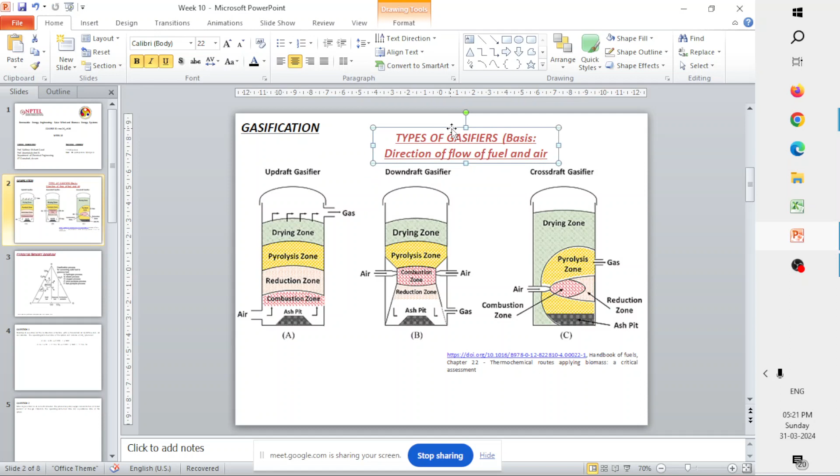In updraft gasifiers, the air enters from the bottom and the fuel comes from the top. Since the direction of the air and the direction of the fuel are opposite, it is called a counterflow gasifier.

In downdraft gasifiers, both the air and the fuel enter from the top to the bottom. Since the direction of both the air and the fuel is the same, it is called a concurrent flow gasifier. In case of a cross draft gasifier, the direction of flow of air and the direction of flow of fuel are perpendicular to each other.

That is the reason it is called cross draft gasifiers. So let's just see one by one what is actually happening in the downdraft, updraft and cross draft gasifier.

First let us see about a downdraft gasifier. As I said previously, it is called concurrent because the air is also entering from the top and the fuel is also entering from the top. Since the motion of air and fuel is in the same direction, it is called concurrent in operation, and the 'down' actually signifies the place from where the gas is taken out. Once you burn the biomass, the product gas generated has to be taken out of the gasifier, and in case of downdraft gasifier, it is taken from the bottom. That is the reason it got the name downdraft gasifier.

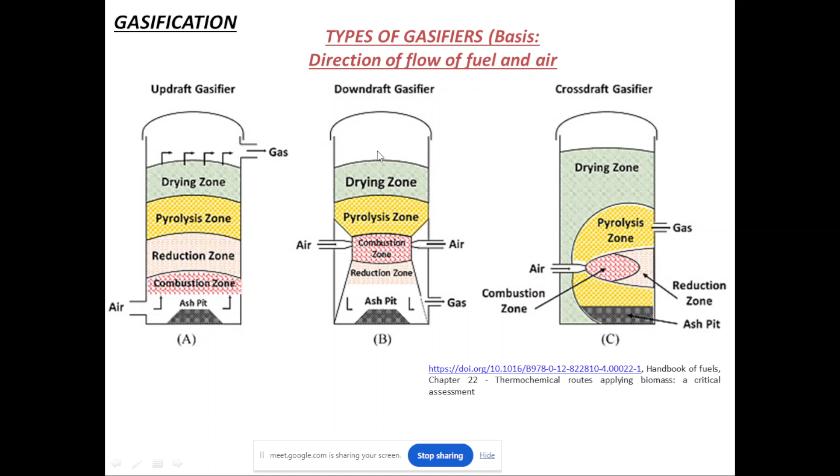Next we move on to pyrolysis. In pyrolysis, as I said, the biomass is burnt in the absence of oxygen.

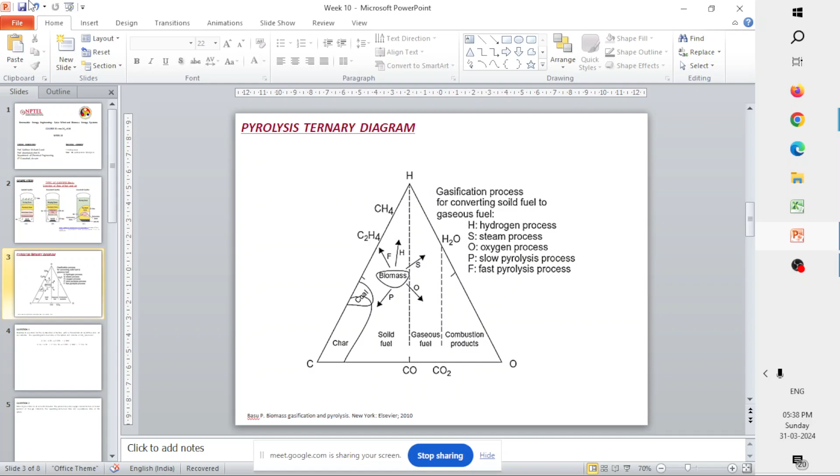Does anybody have any doubt? It's simple. If you know this diagram, and have an understanding of the process, then you will be able to understand. If it is a slow pyrolysis process, a low temperature process, it basically results in the formation of solid char. That's the reason the process is pointing towards your corner, which is corner C.

Similarly, fast pyrolysis process is moving towards your carbon-hydrogen line and away from the oxygen line. So the majority of products produced by a fast pyrolysis process will have carbon and hydrogen as major constituents compared to oxygen. Similarly, in oxygen process, oxygen will be majorly present in your product. Steam will be oxygen and hydrogen, so there won't be much carbon. That's why the arrow mark points towards your OH edge line.

And for hydrogen process, it points towards your hydrogen corner, because the majority will be hydrogen produced in the pyrolysis process. By seeing the diagram, you can actually say what kind of products will be produced for a particular process, or if you know the process, using the diagram you can say what will be the percentage of char. Likewise, by knowing the process you can actually plot the diagram.

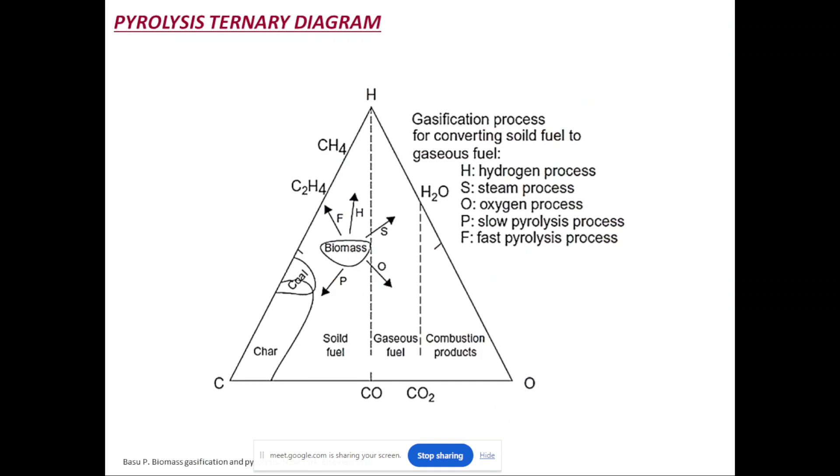So this is about the pyrolysis ternary diagram. If you have any doubts about the gasifier and pyrolysis ternary diagram, then do let me know. In case you don't have any doubts, then we will move on towards solving some numerical problems.

So in case if you have no doubts, let's move towards this question. Let's just read the question. This question is very similar to what we did in the week 9 live interaction session, where we asked you to develop an equation for the combustion of propane, and there also we had a theoretical air requirement and excess air requirement, and we asked you to calculate the air to fuel ratio.

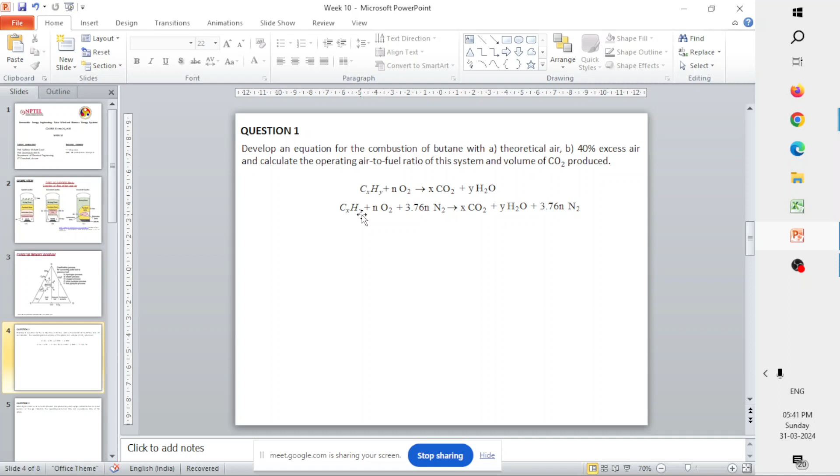Here it's a similar question, but now we are focusing on the combustion of butane. Since we have done this previously and it's also solved in the video lecture in the course, I would like you to solve it first before we discuss the solution here. I'll give you some time to solve the question and then let me know the answer, since this is what we previously did in our last week 9 live interaction also.

I'll just open that so it will be easy for you. So here, if you see, we did it for the combustion of propane, and we had two conditions: one is the theoretical air requirement, and the other is the excess air. 30% excess air was used for the combustion of propane, and we were asked to calculate the operating air to fuel ratio of the system. So we first developed the combustion equation of how propane reacts with oxygen.

Resulting in the formation of carbon dioxide and water. Then with respect to that, we developed two different equations. The first equation is for theoretical air, where the amount of oxygen involved in the process will be in stoichiometric quantity, so the exact quantity will be used. In the second case, you are going to use 30% of the excess air.

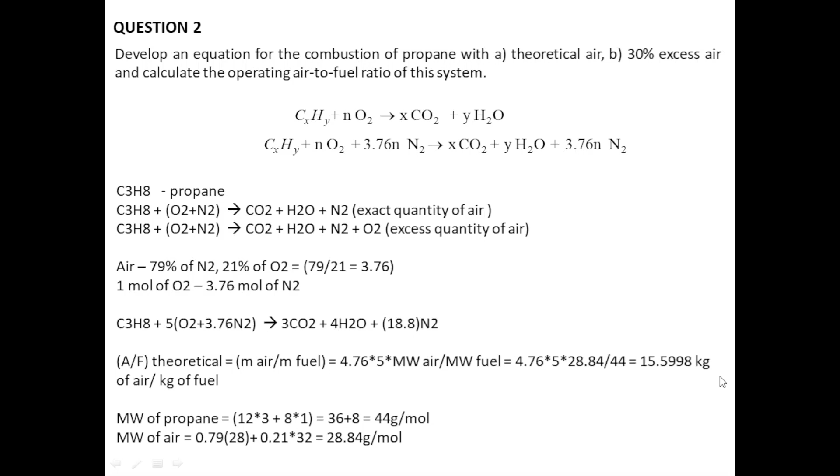Similarly, we calculated for propane, C3H8. Atomic weight of carbon is 12, of hydrogen is 1, and from there you calculate the molecular weight of propane. The number of moles of oxygen involved in this process is 5, so we multiply that by 5, and after the calculation we got the air-to-fuel theoretical ratio as 15.5998 kg.

Similarly we did for the excess air requirement. 30 percentage is present in excess, so with the theoretical quantity, we take 30 percentage of that and add it to the theoretical quantity of air required, and develop the equation. Here also we balance the carbon, hydrogen, oxygen and nitrogen atoms on either the reactant and product side, and from that we calculated the air to fuel ratio of our system.

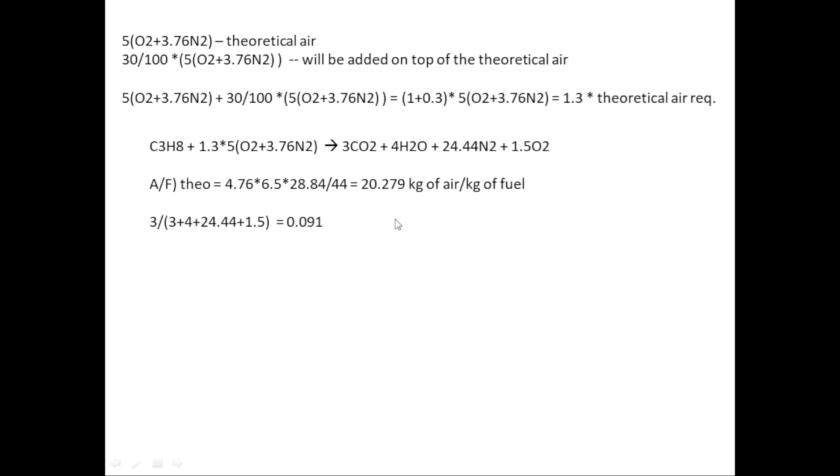So this was the procedure that we developed last week. Similarly, now you have to solve for this particular system of butane.

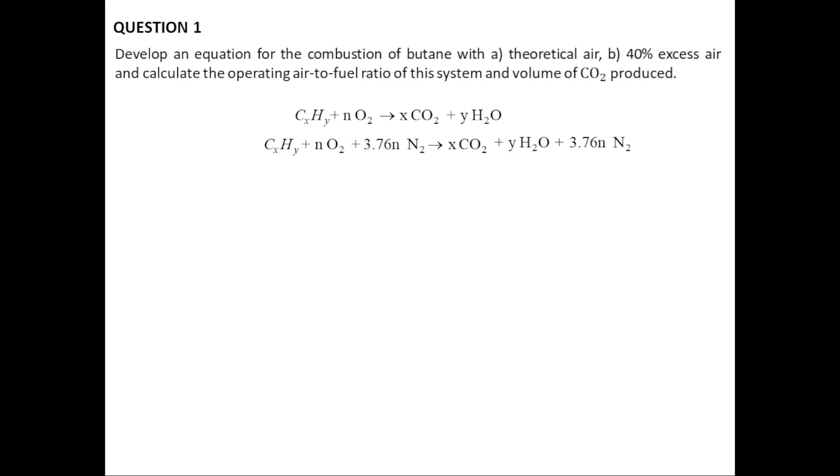First we need to develop the equation for butane, the combustion equation. Then after that we need to calculate the air to fuel ratio for the system. Butane formula is C4H10. I hope you are able to recollect that. Let's just solve that problem here. I hope so, or otherwise you guys can also solve it and let me know the answer, because once you develop the equation it will be easy for you to do the calculation.

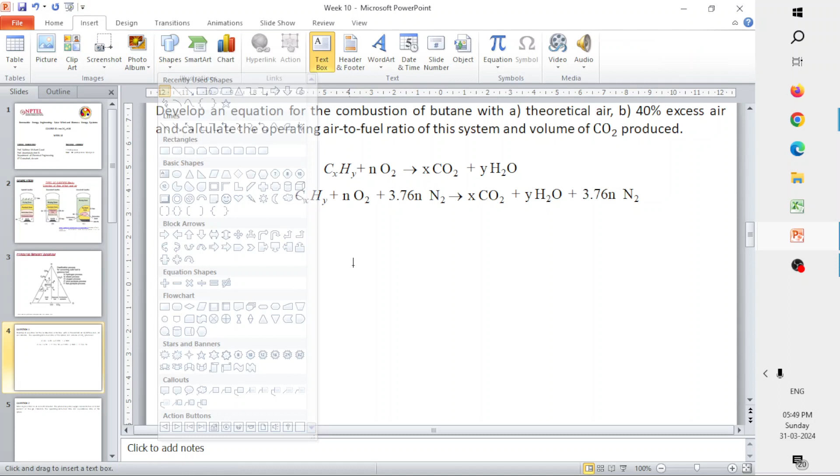Let me write the equation for the combustion of butane with oxygen. Butane is C4H10 plus, you have both your oxygen and nitrogen. Since for the first case we are going to use theoretical air, that is the exact stoichiometric quantity of air, no O2 will be present on the product side. So it will be only carbon dioxide, water, and nitrogen, because the nitrogen is not going to react with the butane system.

Now you need to balance this. The number of atoms of carbon in the reactant side is 4, so in the product side also it should be 4, so we insert 4. The total number of atoms of hydrogen in the reactant side is 10, and since it is H2O, the total atoms should be 10 in the product side too, so it is H2 times 5.

With this we can calculate the number of atoms of oxygen in the product side, and based on that balance it in the reactant side. Oxygen atoms total 4 from CO2, and since it's O2, 4 times 2 is 8, plus 5 from water is 13, and since it's already O2, it will be 6.5, and nitrogen atoms will be 6.5 in the product side. So this is your equation.

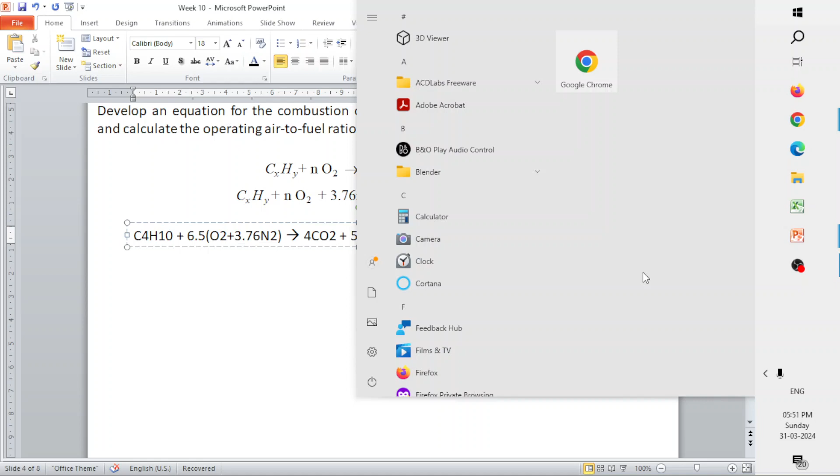Oh sorry, it's 3.76, because for every mole of O2, 3.76 moles of nitrogen are present in the air. You need to take that into consideration too, so it will be 6.5 times 3.76. Let's calculate what that will be: 6.5 times 3.76 equals 24.44. This much amount of nitrogen will be present on the reactant and the product side.

So now it's just about calculating the air to fuel ratio. Stoichiometric air-fuel ratio is nothing but mass of air over mass of fuel, and the formula is 4.76 times N, where N is the number of moles of air involved in the combustion process. Here the number of moles of air is 6.5, so we insert 6.5 and the molecular weight of air.

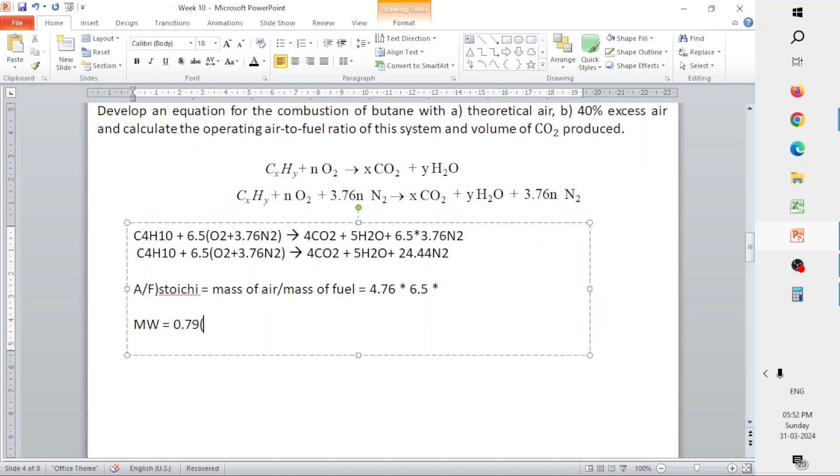So molecular weight of air, let me recalculate here. It's 79% nitrogen, N2 gas molecular weight is 28, plus 0.21, that is the oxygen contribution, and molecular weight of oxygen is 32. If you do the calculation: 6.72 plus 22.12 equals 28.84 grams per mole.

And what is the molecular weight of butane? Please let me know what is the molecular weight of butane.

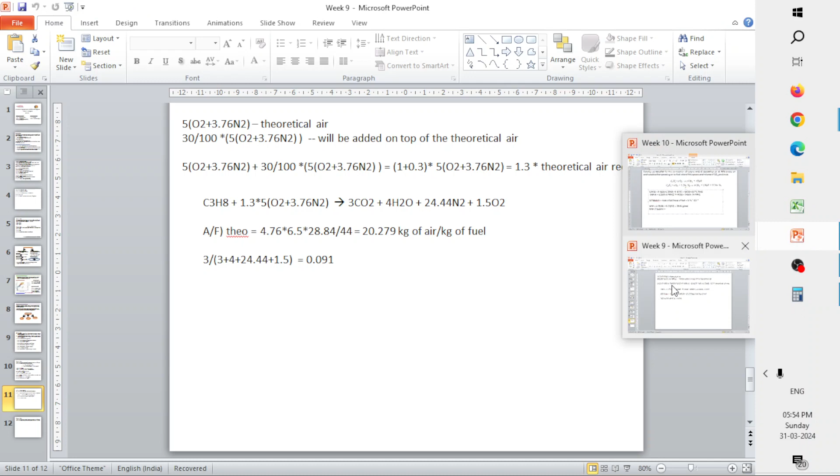It is C4H10, right? So molecular weight of butane will be 4 times atomic weight of carbon, which is 12, plus 10. It is 58 point something, so you can take it as 58, let's keep it as a whole number. So 58 grams per mole. So for 1 mole of butane there will be totally 58 grams.

So now I think you can calculate the air to fuel stoichiometric ratio. This will be 28.84 and that divided by 58. So what will be your answer for air to fuel stoichiometry? It just needs this multiplication.

Yes, what will be the answer? What will be the air to fuel ratio, stoichiometric ratio? Yes, I need answers. What will be the answer for this?

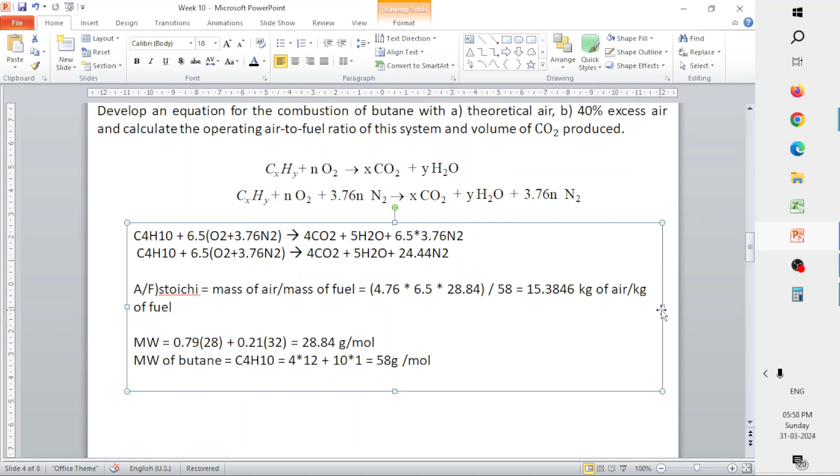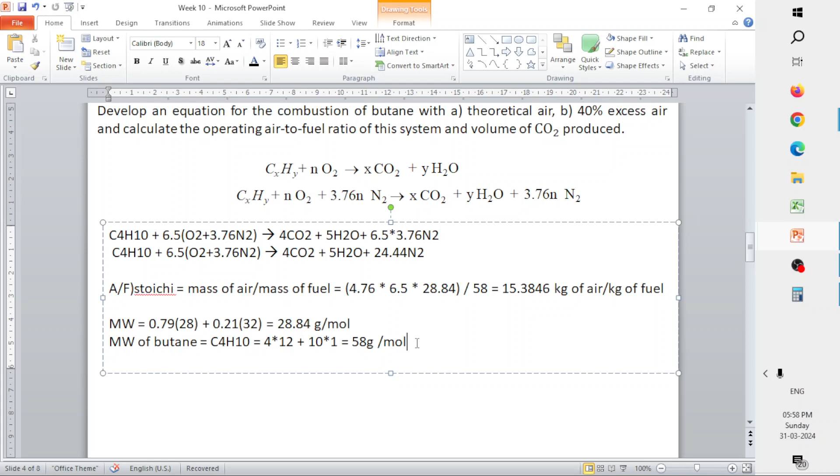So this is for the theoretical requirement or stoichiometric requirement of air. If you burn your butane in stoichiometric quantity of air, this is the air to fuel ratio required. But if you are going to do it in excess of air, the air to fuel ratio will change. So now we are supposed to calculate when you are going to burn your butane with a 40% excess of air. Here what is going to change is the amount of air, the value of n, and that will change your entire answer.

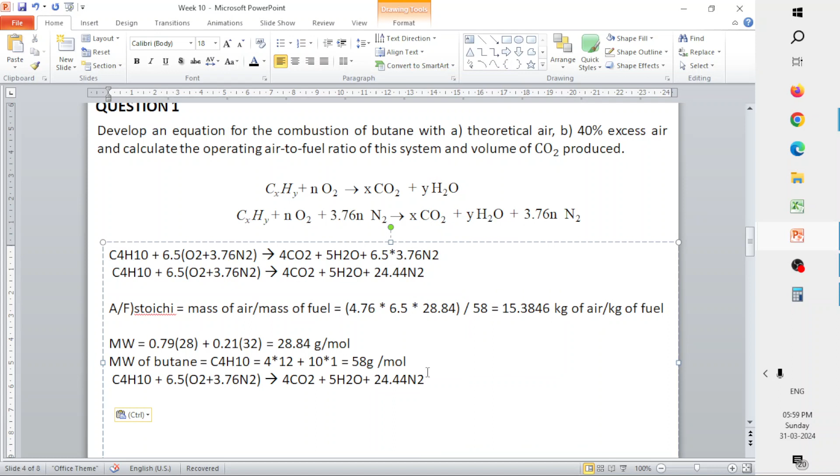So let me know what will be the equation for this system when you are going to use 40% excess of air. You are going to use 40% excess of air in the system compared to the stoichiometric quantity of air that you used for the previous problem. So what will be the new equation?

So it will be nothing but 6.5 times... 6.5 moles of O2 of air is what you require, is your stoichiometric quantity, and you are going to have 40% excess of that. So as I said previously, it will be that stoichiometric quantity plus 40% more of the stoichiometric quantity. So 40% of this will be nothing but 0.4 times 6.5.

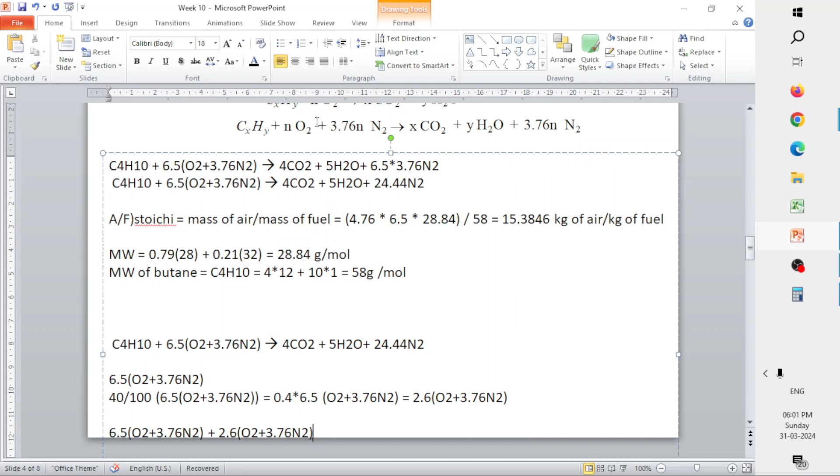So what will be the total? Yes, you just need to add 6.5 and 2.6. So that will be 9.1 mole of air will be required. The 9.1 mole of air will be used for combustion of butane, if you are going to use 40% excess air compared to the stoichiometric quantity of air.

So you now know the number of moles of air required. So you have the equation C4H10 plus 9.1 moles of air is going to react with this. So for 1 mole of butane, 9.1 mole of air is going to react, and that is going to generate carbon dioxide plus water plus the excess of oxygen. If any oxygen is going to be present, that oxygen will be released out, and then your N2, which will come out as such as it entered without reacting.

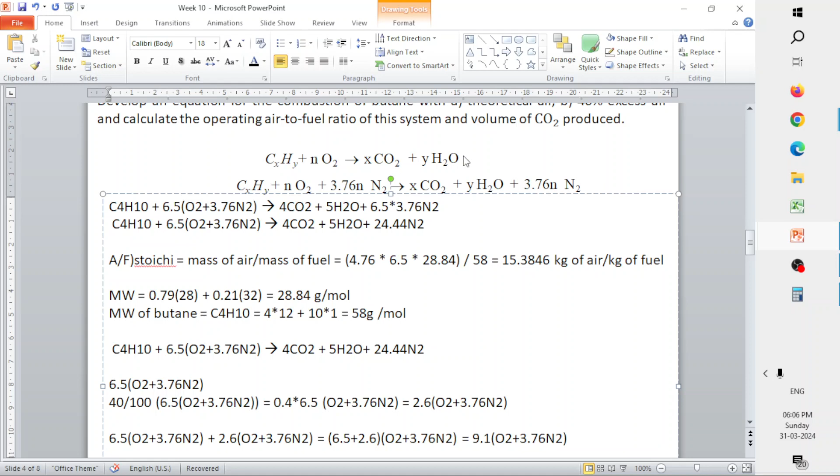So which means 9.1 mole of air will be participating in your combustion reaction. So air to fuel ratio will be nothing but, can you guys calculate and let me know what will be the air to fuel ratio in this case when you use 40% of excess air? I have told everything, you just need to do the multiplication.

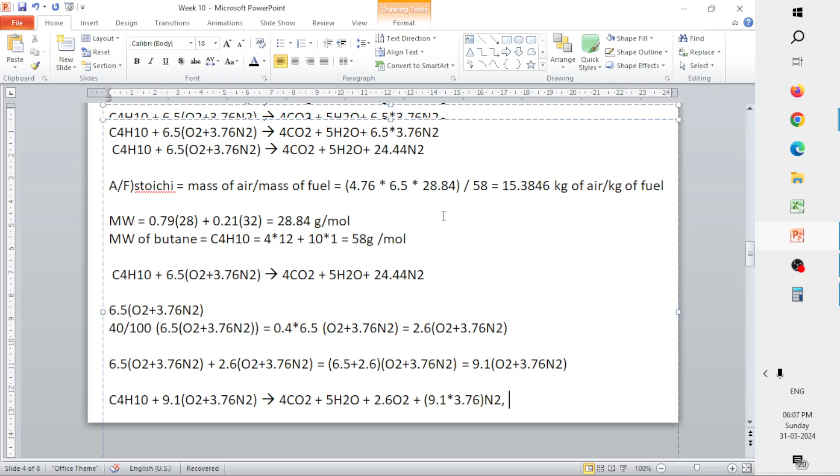A air to fuel ratio for the system is required. What is it? Please let me know.

So air to fuel ratio of your system is nothing but the mass of the air involved to the mass of the fuel used, and that is nothing but 4.76 times the number of moles of air used in the combustion of the butane, times your molecular weight of air by molecular weight of your fuel. Molecular weight of air is 28.84. Molecular weight of fuel, here fuel is butane, and butane's molecular weight we calculated as 58. So you know the molecular weight of fuel, the molecular weight of air, and also the number of moles of air involved in the combustion process. So please let me know what is the air to fuel ratio of the system.

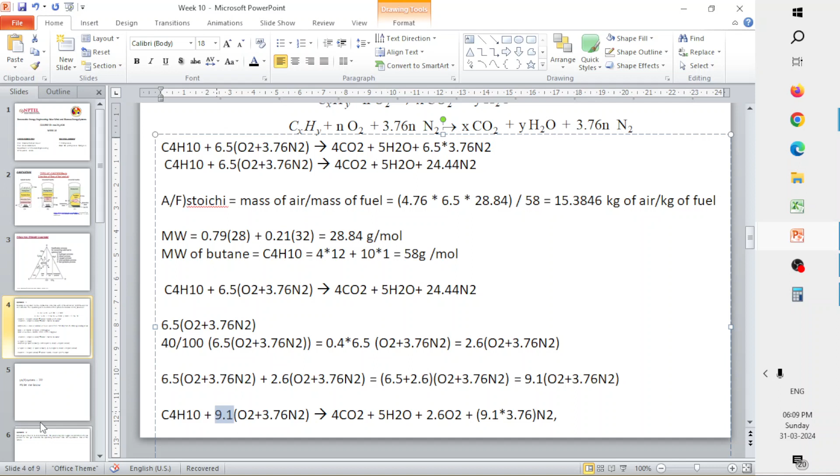It's just you need to do the multiplication. You know the number of moles of air that is involved in the combustion process. So 9.1 moles of air, or excess air, is involved in the combustion of your butane. So you know now your value of n. Let me know the answer.

So let's calculate. 4.76 times 9.1 times your molecular weight of air, that is 28.84, and your molecular weight of fuel, that is butane, which is 58. So let's calculate 4.76 times 9.1 times 28.84 divided by 58. So the answer is 21.538 kg of air per kg of fuel.

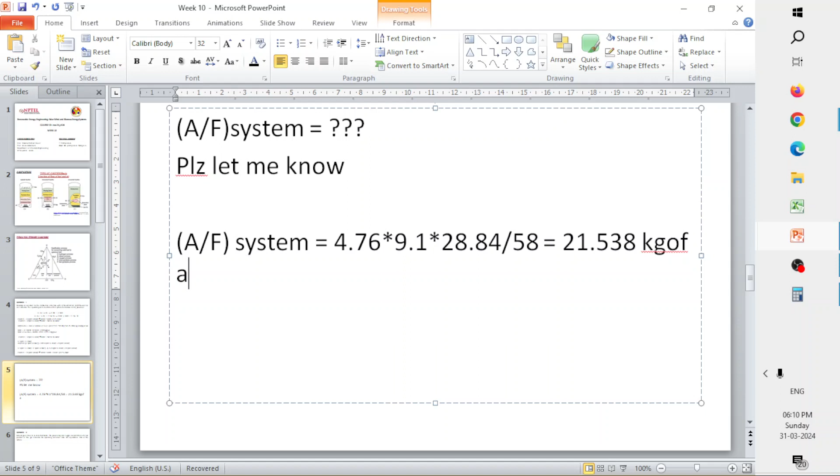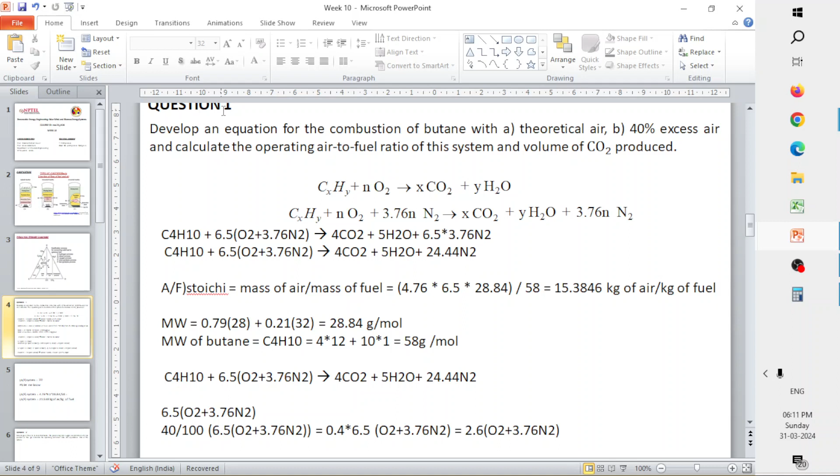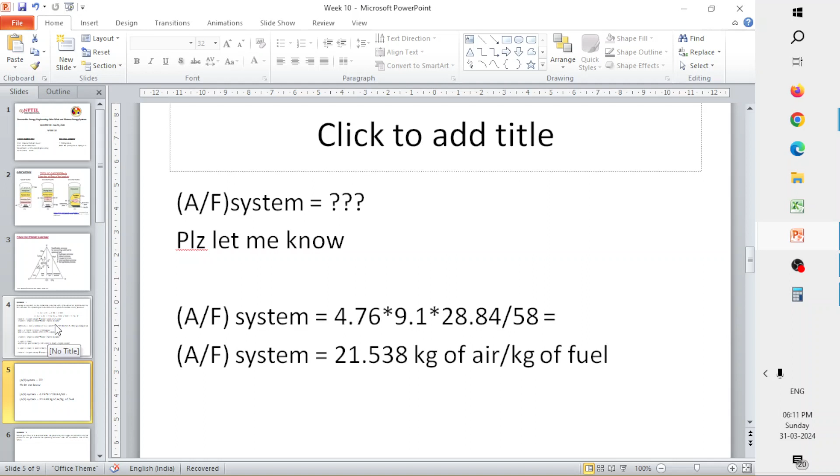So this is your air to fuel ratio for the system that involves 40% excess air for the combustion of butane. So we are done with these kinds of questions on developing the equation for the combustion of any kind of hydrocarbon, and then calculating the air to fuel ratio for that system. We have solved two problems, and I hope you will find it easy and you can solve these types of questions comfortably and confidently.

Whenever it is asked for you to solve, either in your assignment or exam, we now move on to our next question, which is a similar type of problem on calculating the air to fuel ratio and equivalence ratio. Here we are taking a natural gas, which is going to be fired in an industrial boiler. The process requires the oxygen concentration of 4 mole percent of flue gas. They are asking you to calculate the air to fuel ratio and the equivalence ratio.

So here you know the oxygen concentration, but it's given in terms of mole percentage of your flue gas. It's not directly given like theoretical air requirement or excess air requirement, but in terms of mole percent. So you are supposed to use this information to calculate the two parameters, and you can assume here that your natural gas consists of methane. Natural gas is methane. For solving purposes, we take natural gas as methane.

So again, very similar, you need to develop the equation and then solve the problem. Since we now know how to develop the equation from our previous live interaction session and also from today's session, I require you to write the equation for the combustion of methane, CH4. You write the combustion equation of methane and then tell me.

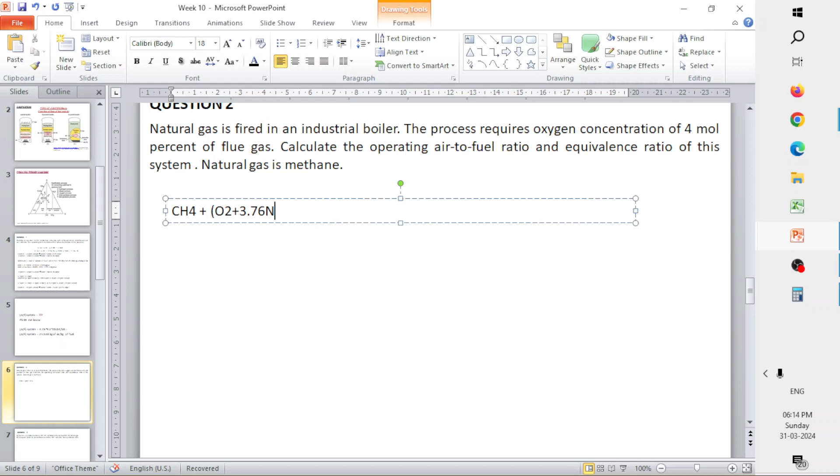So it is nothing but CH4 plus your air, that is oxygen and nitrogen. And since here we do not know whether they are going to supply us with an excess of air or whether it's just a theoretical quantity of air, here we just know that the concentration is 4 mole percentage of flue gas. So let's just consider A moles of air is going to react with your methane and then form the products.

So that will be CO2 plus H2O. And since we are not aware of whether it is stoichiometric quantity of air, theoretical quantity of air, or excess of air that is going to be involved in the process, for safety purpose we just write O2 in the product side also, plus the nitrogen gas that will be coming out of the system.

So here if you see, you can actually balance the hydrogen atoms, you can also balance the carbon atoms, that will be 1. Now you just need to balance your oxygen atoms. Nitrogen atoms will be 3.76 times A.

And you do not know how much amount of the O2 is going to come out in your product side. It can be any value, B can be also 0. So you don't know, so you give a variable B.

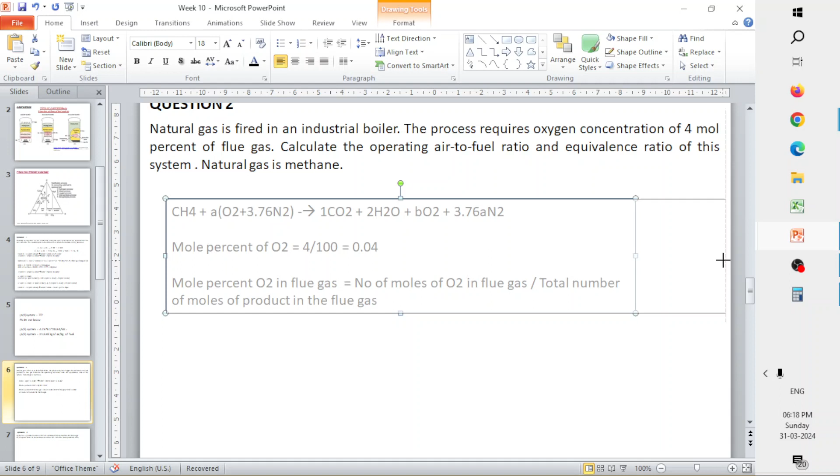So mole percentage of O2 in the flue gas is 0.04. Number of moles of O2 in the flue gas, if you see here, we have taken a variable B, so we can write B divided by total number of moles of product in the flue gas.

So mole percent is nothing but number of moles of that particular component to the total number of moles in the product. So total number of moles in the product will be 1 mole from CO2, 2 moles from water, and again B moles from O2, because since you are calculating the total number of moles of O2 in the total number of moles in the product side, you need to also take into account the number of moles of O2 here, plus 3.76 times A.

So you can now calculate the relationship: 0.04 is nothing but B divided by 3 plus B plus 3.76 times A. Now we need to get a relationship between B and A, because here you have one equation but two variables, so you cannot solve. So we need another relationship between B and A, so that we can solve this equation.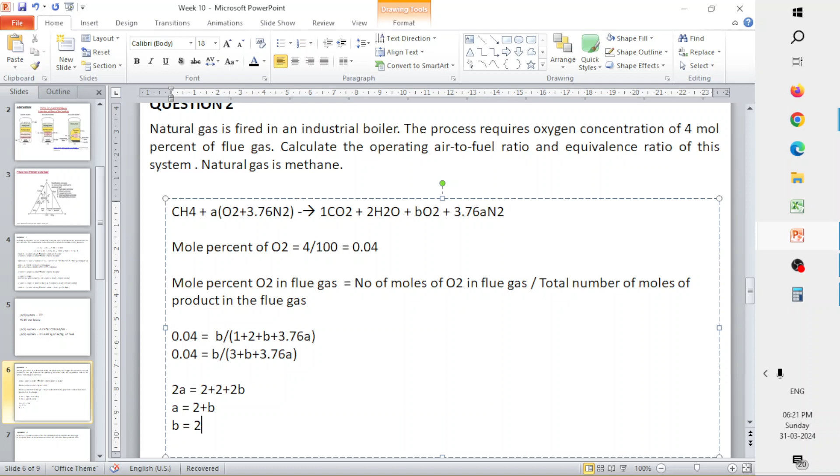This equation is with respect to our given data that says that the oxygen concentration in your flue gas is 4 mole percent. So we express that mole percentage as number of moles of O2 in the flue gas to the total number of moles of product in the flue gas, and then we balance our equation for the carbon, hydrogen, oxygen and nitrogen atoms, and then we get a relationship as B equals to A minus 2. This is your second equation. Now using two equations, you have two unknown variables and two unknown equations, so you can solve for both the variables.

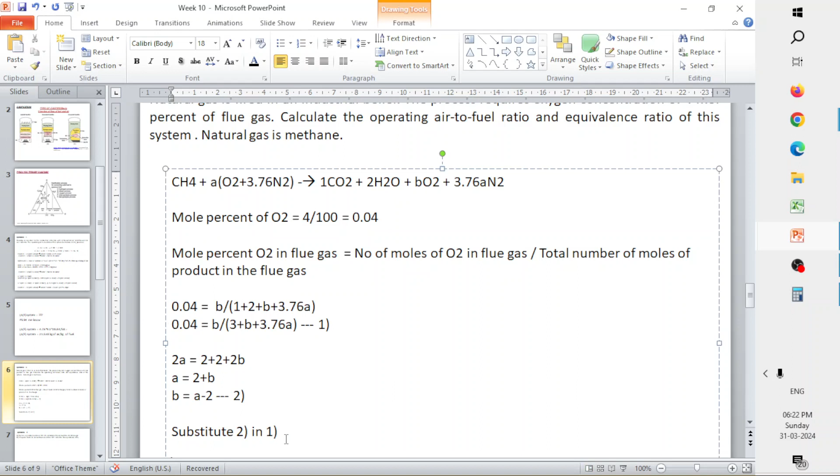So substitute 2 in 1, so that will be 0.04 equals to, here B is nothing but A minus 2, so A minus 2 divided by 3 plus A minus 2 again plus 3.76A. So that will be A minus 2 divided by 3 minus 2 will be 1 plus A plus 3.76A will be 4.76A.

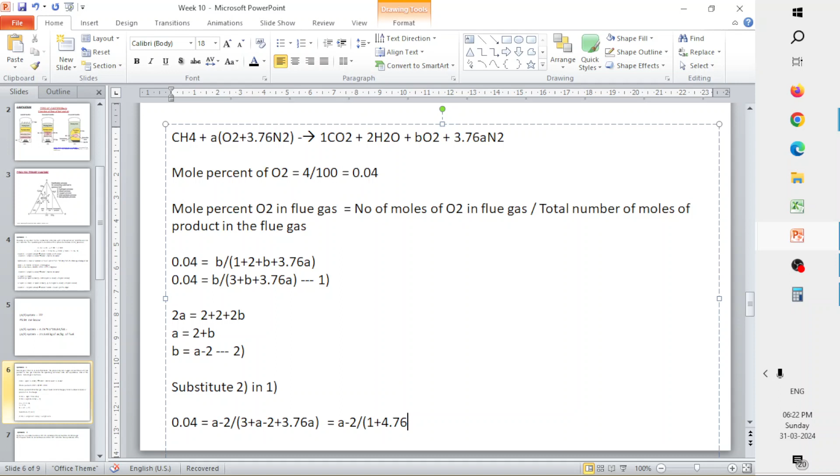So now you need to solve the equation and get the value of A. So do let me know what will be the value of A. It just you need to cross multiply and then get the value of A.

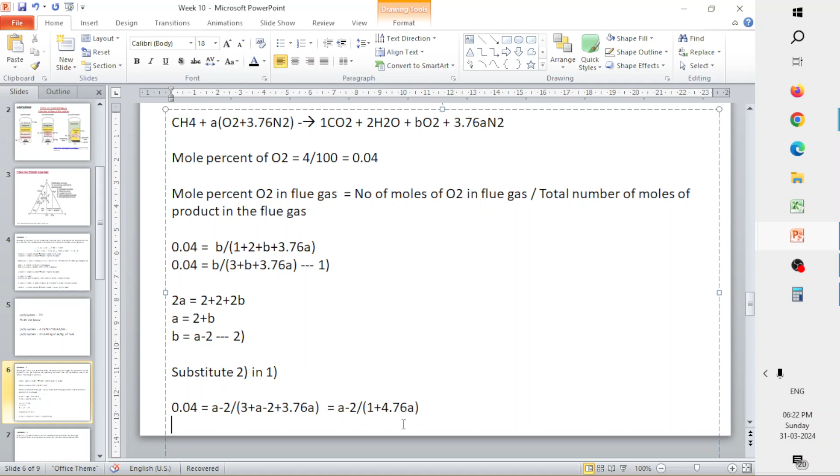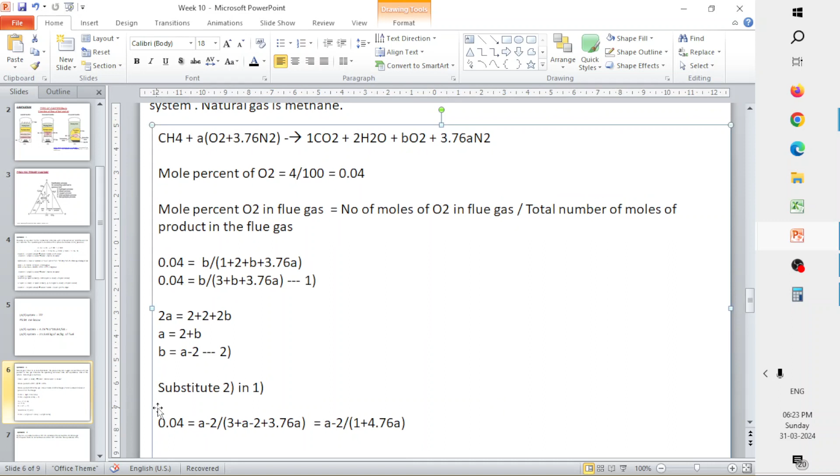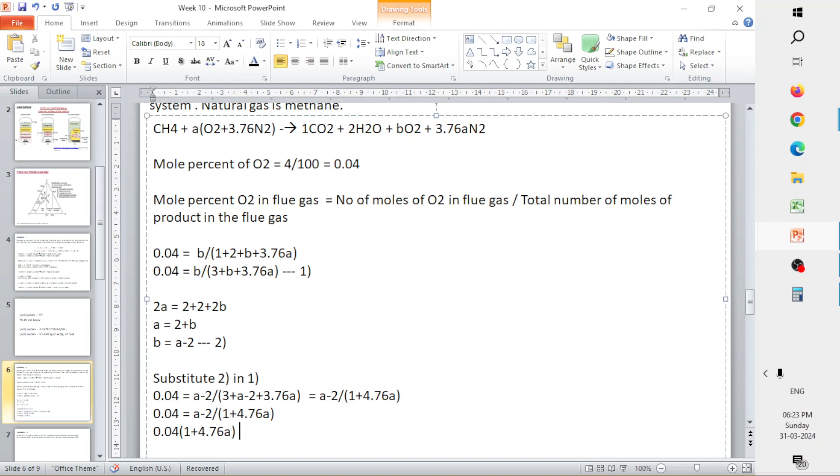So 0.04 equals to A minus 2 divided by 1 plus 4.76A. So if you cross multiply this, yeah, if you cross multiply this, you will be getting is equal to A minus 2. So just open the bracket.

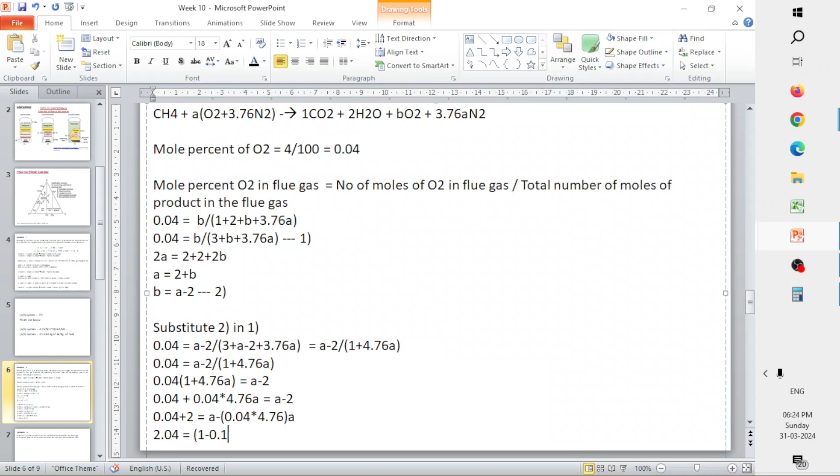We take the variables to the right hand side and then your numericals to the left hand side. So it will be A minus 0.04 times 4.76. So it will be 2.04 equals to 0.04 times 4.76, that is 0.1904. 1 minus 0.1904 times A. So the value of A will be 2.04 divided by what is 1 minus 0.1904. 1 minus 0.1904 is 0.8096.

So that will be 2.04 divided by 0.8096, which will be 2.519 or 2.52 you can take. So this is your value of A.

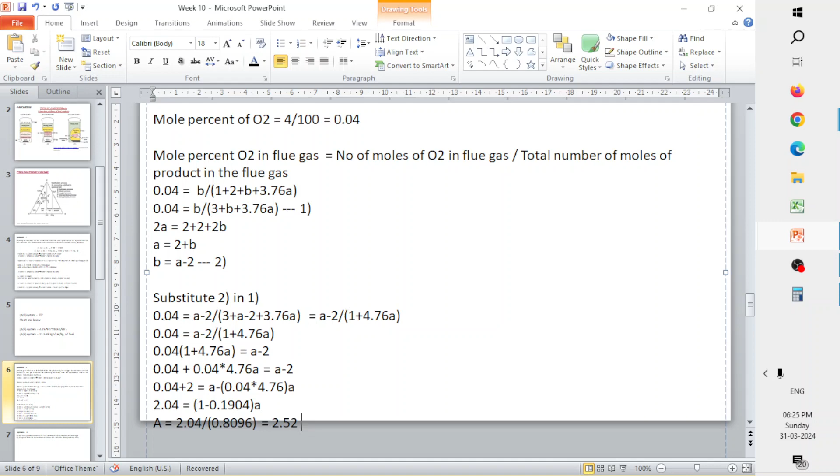Now you know your value of A, so that means you know your number of moles that is involved for the combustion of methane. From this you can calculate the air to fuel ratio for the system. So calculate this and then let me know the answer. Please let me know the answer. I'll just come back, I need to take some water. So in the meantime, please calculate the air to fuel ratio for your system.

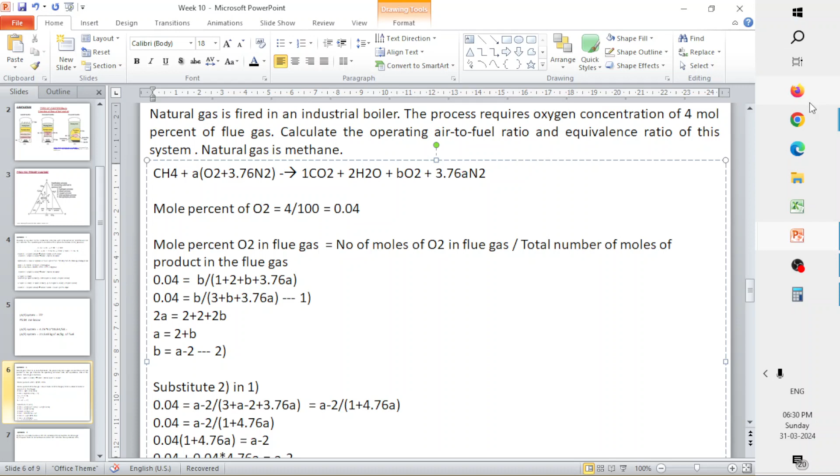So yes, what is the air to fuel ratio for the system? Anyone? Okay, so let's just calculate that value.

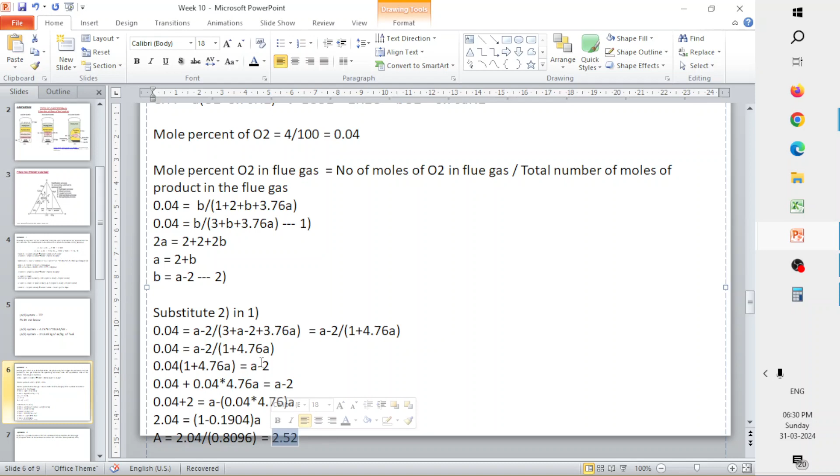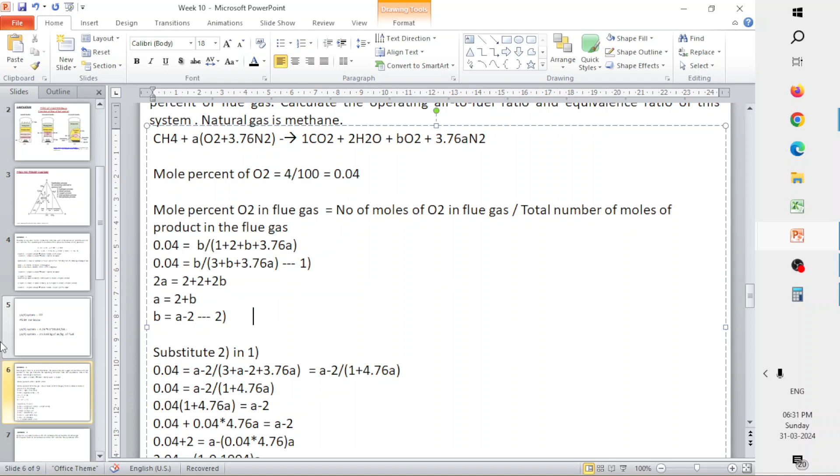So now here you know the value of A. So A is nothing but the number of moles of air that is involved in the process. So which will be air to fuel ratio of the system is nothing but mass of your air to the mass of the fuel. So that is equal to 4.76 times the number of moles of air that is involved in the process.

So A value is 2.52 we calculated, that is your number of moles of O2, or of air that is involved in the process, times 28.84 divided by methane's molecular weight, CH4, so 12 plus 4, that is 16. So what will be the answer for this? Let's just calculate. 21.6213 is the answer.

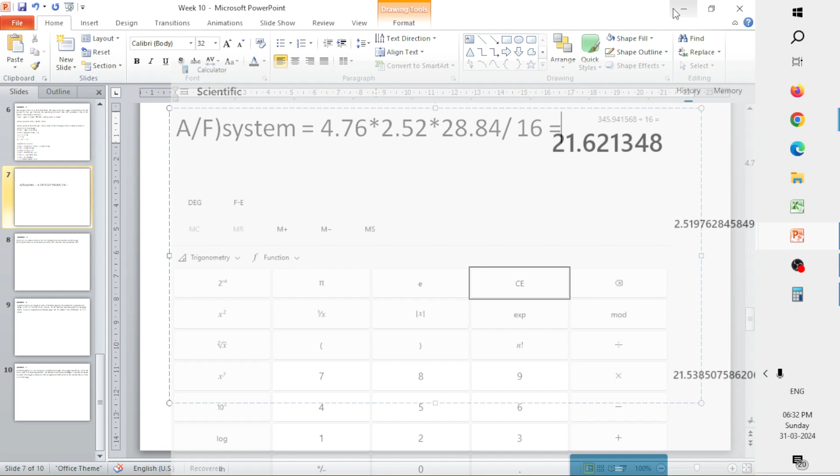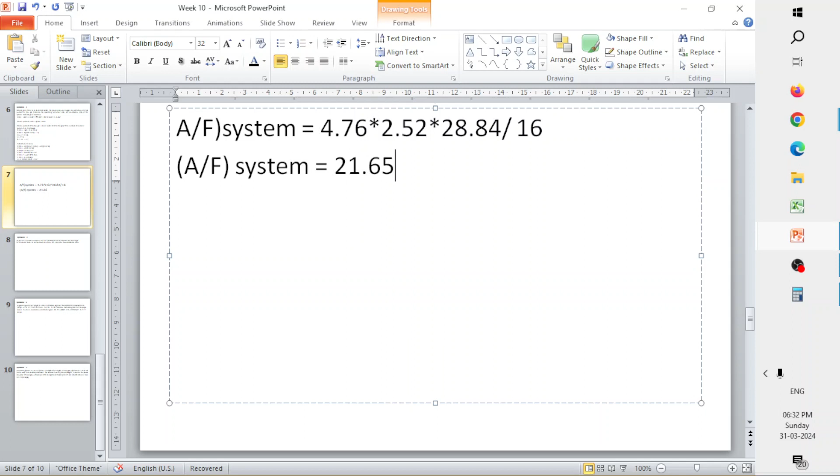Kg of air per kg of fuel. So the air to fuel ratio for your operating system is 21.65 kg of air per kg of fuel if you use 2.52 moles of air for the combustion of methane.

Now we are also asked to calculate the equivalence ratio of your system. So what is the definition of the equivalence ratio? So if you remember, the equivalence ratio is defined as the ratio of the air to fuel ratio, or the stoichiometric air to fuel ratio to the air to fuel ratio of your system, right? So it is, what is your equivalence ratio? Equivalence ratio is nothing but air to fuel ratio, the stoichiometric air to fuel ratio.

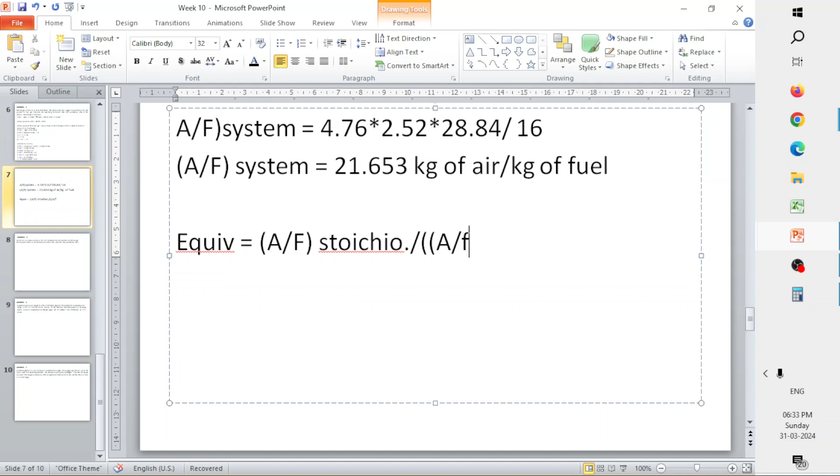Stoichiometric divided by the air to fuel ratio of your system, that is the operating system in operation. So in operation we know the air to fuel ratio is 21.65 kg of air per kg of fuel, but to calculate the equivalence ratio you need to know what is the stoichiometric air to fuel ratio for your system. So for that we need to again develop that equation and then calculate the air to fuel ratio stoichiometry, and from there we will be able to calculate the equivalence ratios.

So we need to know how much amount of moles of air will be used, or what is the stoichiometric moles of air will be required for our process, right? So that will be CH4 plus O2 plus 3.76 N2, since we know we are just going to use stoichiometric quantity of air, so there will be no excess of oxygen that will be coming out of your system in the product side as a product.

So here again we need to balance the carbon, hydrogen, oxygen and nitrogen atoms. 2 and 2 will make 4, so carbon and hydrogen atoms are both balanced. If you see the oxygen atom total is 4 here, so it will be 2, and this will be 3.76 times 2.

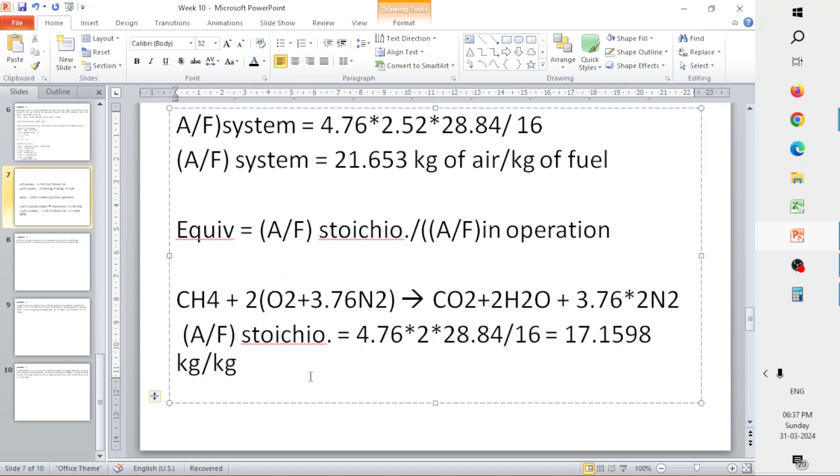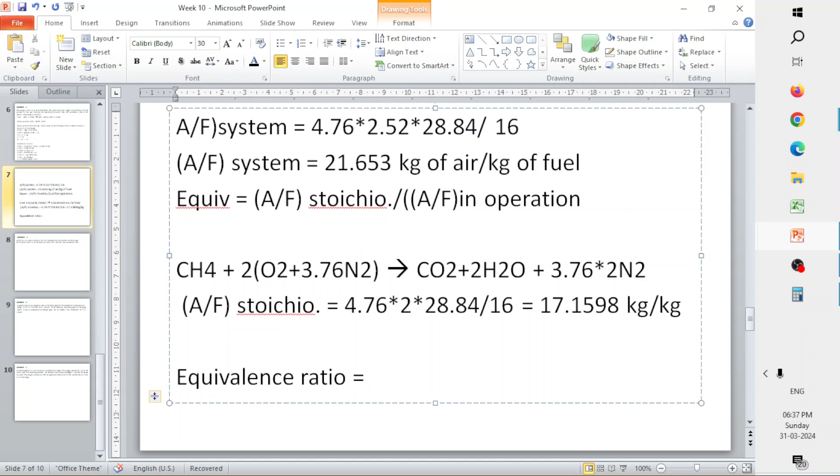Similarly, kg per kg. Now we need to calculate the equivalence ratio, that is nothing but the stoichiometric air to fuel ratio, that is 17.1598 divided by the air to fuel ratio of your operating system, that we got as 21.653.

So your equivalence ratio will be 17.1598 divided by 21.653, 0.792. This is your equivalence ratio.

So this is how you calculate your equivalence ratio. When you are asked to calculate the equivalent ratio, you are supposed to calculate both the stoichiometric air to fuel ratio and the air to fuel ratio of the operating system as per the question, and then divide the stoichiometric air to fuel ratio by the air to fuel ratio of your operating system to get the equivalence ratio. So similarly, for this question also, we can calculate the equivalence ratio.

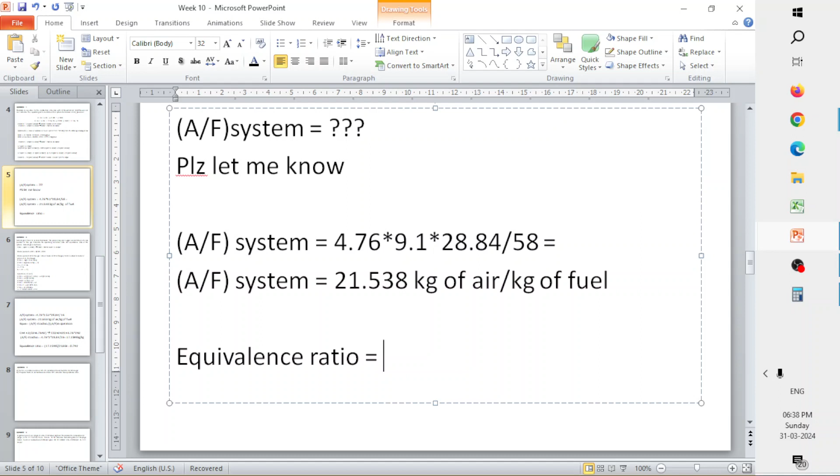So it will be nothing but the stoichiometric value is, where is it, 15.3846. This is for the previous problem. If you remember, over there we didn't calculate the equivalence ratio, so we are calculating it now.

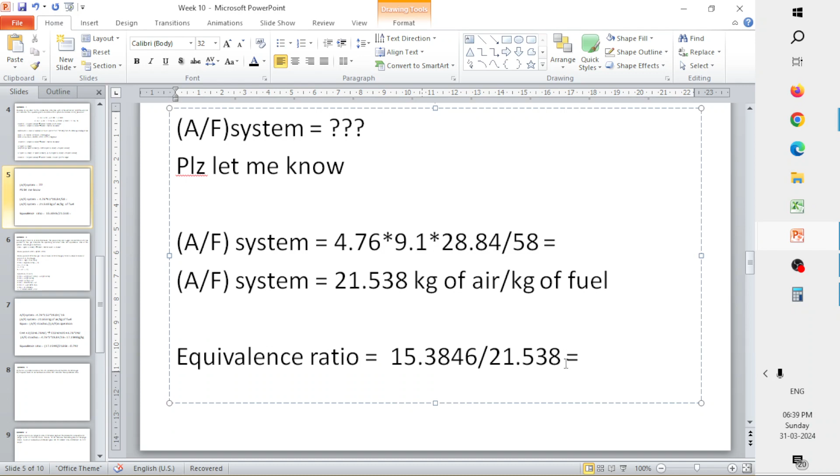And air to fuel ratio of the operating system as per the question is 21.538. So the value will be, what is the value, 15.3846 divided by 21.538, 0.7143. So the equivalence ratio for our previous problem is 0.7143 and for this problem is 0.792.

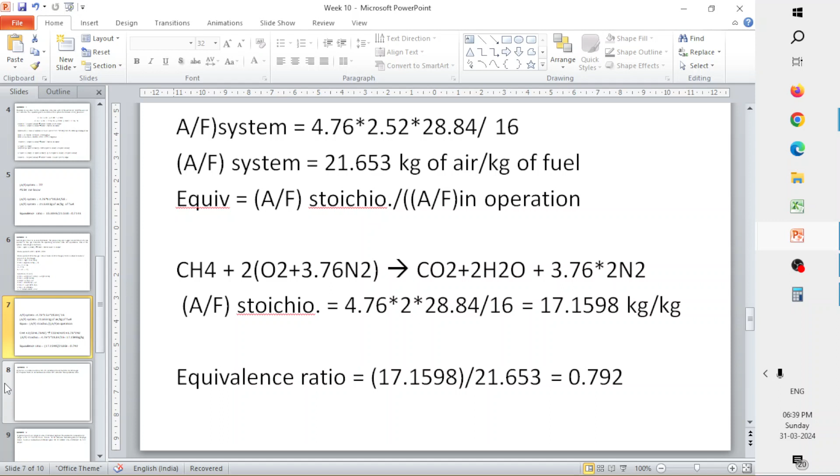So this is how you develop an equation, calculate the stoichiometric air to fuel ratio and the air to fuel ratio of your operating system, and then its equivalence ratio. Similarly, we have another question, but this is a very simple question compared to what we have done previously, and this is a very straightforward question also. Here it is in 2 parts, and these 2 parts do not have any interdependency.

The first part says that your equivalence ratio is 0.6 and is asking you to determine the air to fuel ratio for an ethane gas, operating air to fuel ratio for your ethane gas. Second part gives your air to fuel ratio as 18:1, and they are asking you to calculate the equivalence ratio.

So instead of asking you to develop an equation and then calculate all the parameters, one parameter is given to you, and you are asked to calculate the other interdependent parameter. So compared to the previous two questions, this question is quite simple.

So for the first question, since you are given the equivalence ratio and they are asking you the air to fuel ratio of a system, you have to calculate the air to fuel stoichiometry first, the stoichiometric air to fuel ratio. Once you calculate that, you know your equivalence ratio and your stoichiometric air to fuel ratio, so you will be able to calculate your air to fuel ratio of your system.

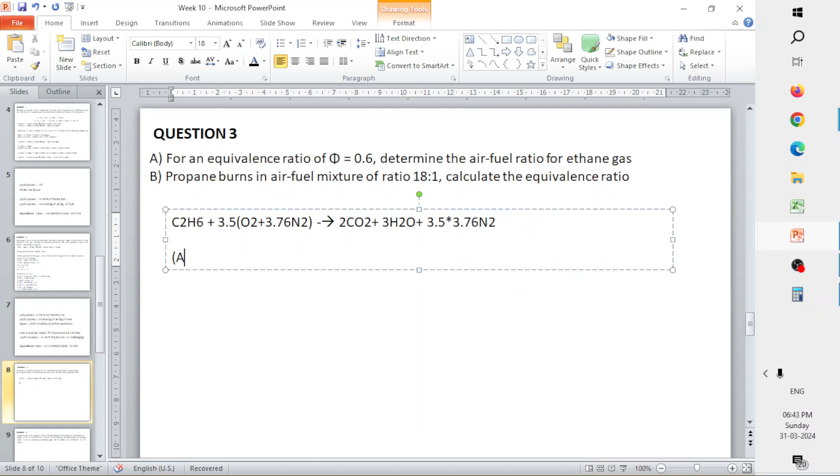Since you know this, you can calculate the stoichiometric air to fuel ratio as 4.76 times 3.5 times air is 28.84, this remains constant, and molecular weight of your fuel is the ethane molecular weight, so that will be 24 plus 6, so 30. 4.76 times 3.5 times 28.84 divided by 30 gives 16.015.

So if you know your stoichiometric air to fuel ratio, now you have your equivalence ratio given to you. Once you know both of them, you will be able to calculate your air to fuel ratio for the system, which is nothing but the stoichiometric air to fuel ratio divided by your equivalence ratio. So that will be 16.015 divided by 0.6, that is 26.69.

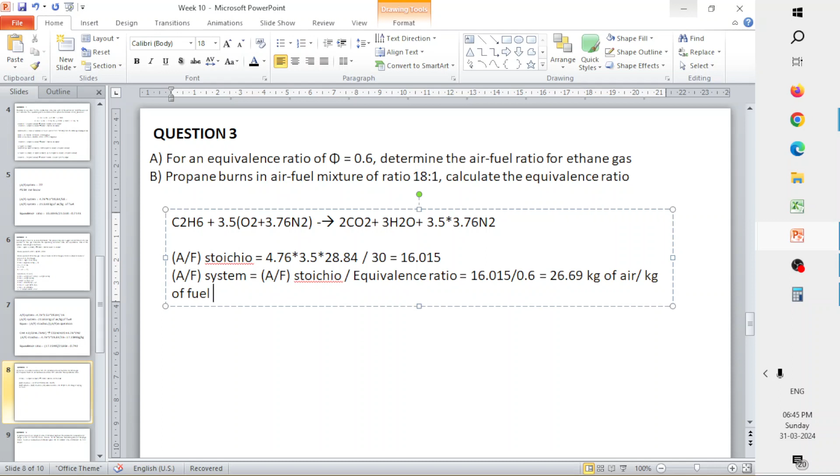That's kg of air per kg of fuel. It is important to know the units for this parameter. So now you know how to solve one. I hope you will be able to solve the B part also on your own. You can take this as a home task, it is very similar. You need to develop an equation which involves stoichiometric quantity of air.

You need to develop an equation to get the number of moles of air that will be required for burning your propane. Once you know the number of moles of air required for burning your propane, you will be able to calculate your stoichiometric air to fuel ratio. And once you know that, you have your air to fuel mixture ratio for your operating system, so then you will be able to calculate your equivalence ratio.

So yeah, we end our discussion on air to fuel ratio and equivalence ratio here. We have approximately solved 5 problems, including what we covered in the last live interaction session. I hope you will be able to comfortably solve this now.

Now, in case if you have any doubts in this, please let me know, so that we can have a discussion over this before we move on to our next 2 questions. Does anybody have any doubt?

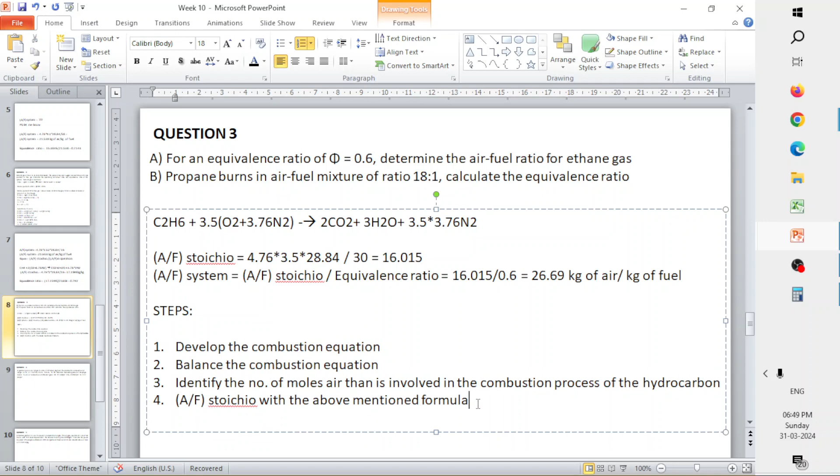So if you don't have any doubt, let's move on to the next question. Here it states that a gasifier is used, and it's producing syngas at a rate of 0.265 kilomole per kg of feed, and the volumetric composition of the syngas is given as carbon monoxide, methane, hydrogen and nitrogen. Now they are asking you to calculate the heating value of your syngas, and they have given you the heats of combustion of different gases also.

So here you are asked to calculate the heating value. It's very simple. Let's solve.

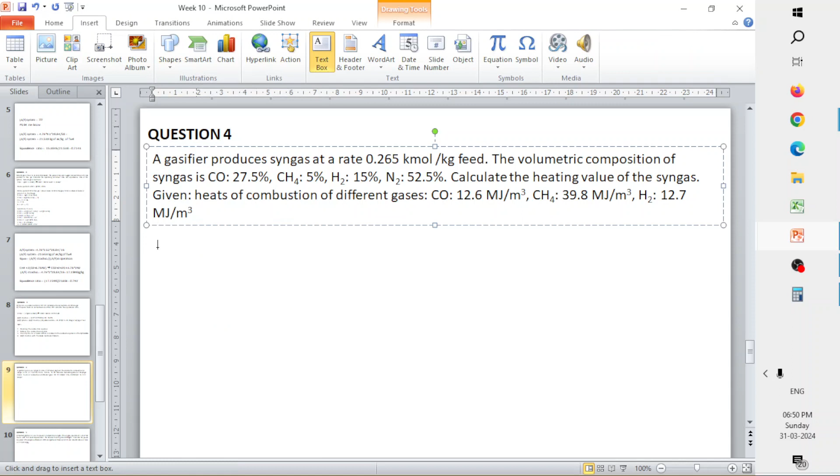Your syngas has the following composition: 27.5% carbon monoxide, 5% methane, and 15% hydrogen gas. Nitrogen we usually don't take into account because it is inert and incombustible, so it will not be adding any heating value to your syngas system. Whatever part is dedicated for nitrogen can be neglected because it does not undergo combustion. It's not a combustible gas.

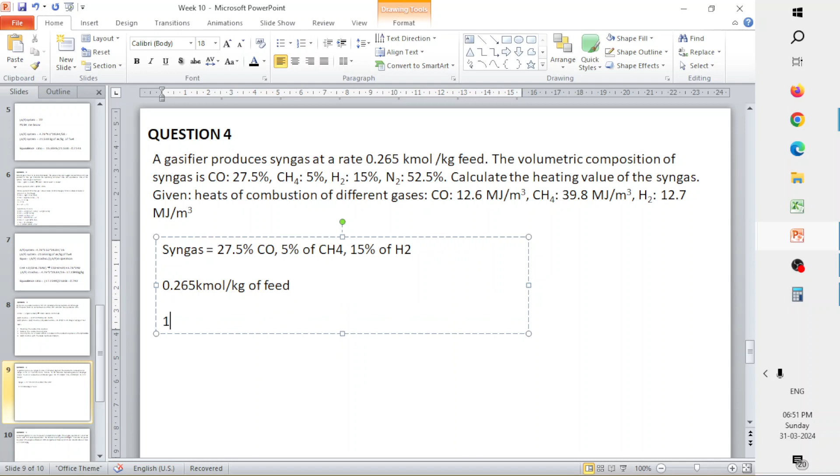We are given the heat of combustion values, and they are asking for the heating value of the syngas. It's also given that the syngas is produced at a rate of 0.265 kilomole per kg of feed. So what does it mean? For 1 kg of feed, you have 0.265 kilomole, or 265 moles, of syngas produced. So for every 1 kg of feed fed into your gasifier, 265 moles or 0.265 kilomoles of syngas comes out.

Now the composition we have for the syngas is a volumetric composition. It's not based on number of moles or mass, it is based on volume. So you cannot just use the 265 moles directly to find the contribution from each gas, because the composition is in terms of volume. You need to convert the number of moles into their volume percentage and then calculate the heat of combustion.

So how to convert moles into volume? I hope you recollect that 1 mole occupies 22.4 liters of gas at STP condition. Which means, in terms of meter cube, 1 mole will occupy 0.0224 meter cube of gas at STP, because 1 meter cube equals 1000 liters. So 1 liter equals 10 power minus 3 meter cube, and multiplying gives 1 mole of gas occupies 0.0224 meter cube of space.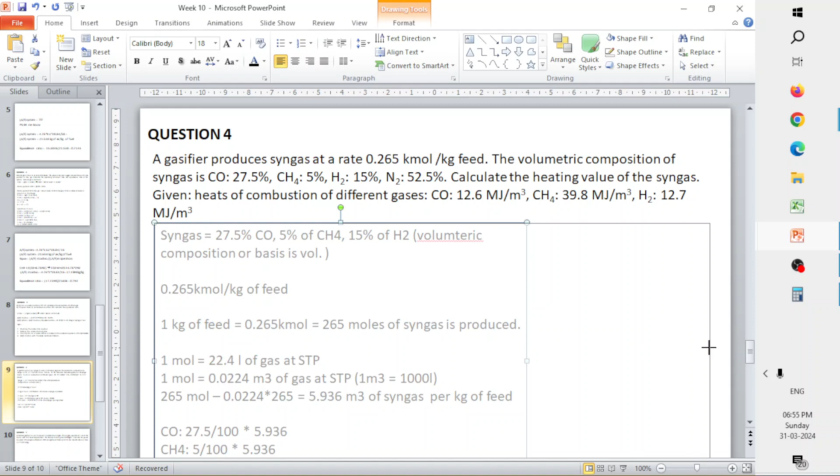For carbon monoxide, it is given as 27.5%, so 27.5 divided by 100 times 5.936. Similarly for methane it will be 5%, so 5 by 100 times 5.936. Similarly for hydrogen gas it will be 15 by 100 times 5.936. We need to calculate the contribution from each gas.

0.275 times 5.936 is 1.6324 meter cube. I am writing it as 0.275 because 27.5 by 100 is nothing but 0.275. Next, for methane it will be 5.936 times 5 by 100, that is 0.05, giving 0.2968 meter cube. Now for hydrogen gas it is 5.936 times 15%, 15 by 100, so 0.15, giving 0.8904 meter cube. This is the contribution from each of the gases.

This particular amount of meter cube times the heat of combustion of that particular gas will give you the heating value of the syngas. So the heating value of syngas is nothing but the volume of the particular gas times the heat of combustion of that gas. So what will be the value? You just need to multiply this for each and every different gas that is a constituent of your syngas.

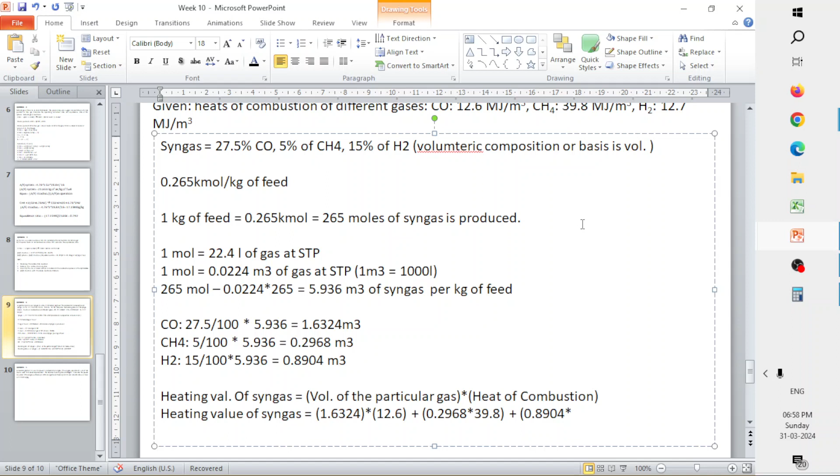So meter cube times megajoules per meter cube, meter cube will get cancelled, so it will be only in terms of megajoules. So heating value will be, you need to multiply each one of them.

1.6324 times 12.6, 20.568, plus 0.2968 times 39.8, that will be 11.81.

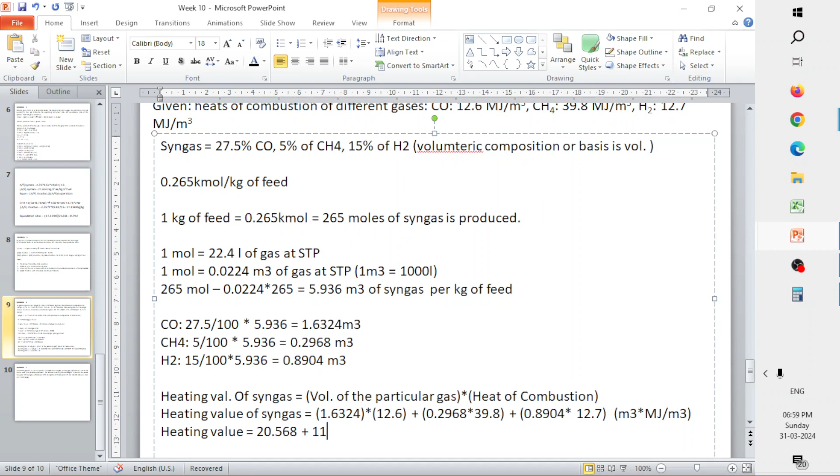Plus 0.8904 times heat of combustion of hydrogen gas is 12.7, 10.279.

So if you add all of them, 20.568 plus 11.81 plus 10.279, that gives 42.657 megajoules.

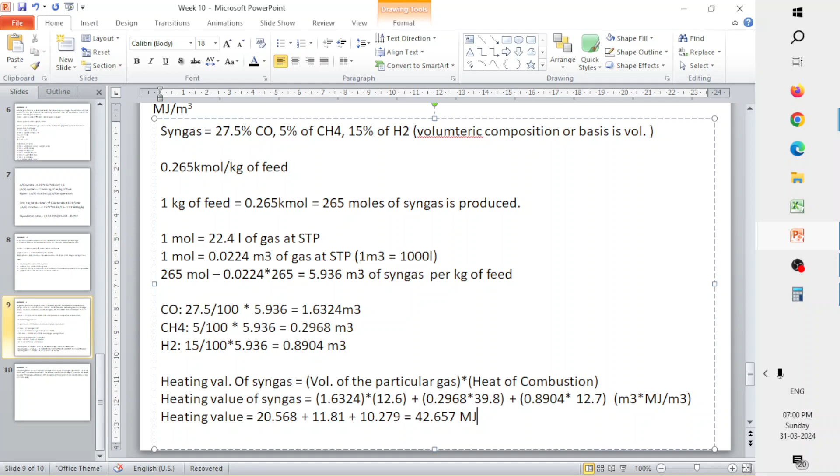So the heating value of your syngas is nothing but 42.657 megajoules. This is how you calculate the heating value of the syngas if the composition is given either in terms of mole percent or mole fraction, and your syngas is produced at this much amount of kilomole per kg of feed. Then you can directly find the contribution by multiplying the percentage times the amount of syngas produced.

But if it is instead asked in terms of mass composition or volumetric composition, then you need to convert the amount of syngas produced from the number of moles to either mass or volume, and then calculate their contributions. After calculating the contribution, you multiply that with the heat of combustion of that particular gas and sum it up to get the heating value of your syngas.

So the difference is what makes this question a bit tricky: the composition of your syngas is given in terms of volumes and not in terms of moles. So that is the trick here. You need to be very careful while reading the question, otherwise the chances of making mistakes could be more in this case.

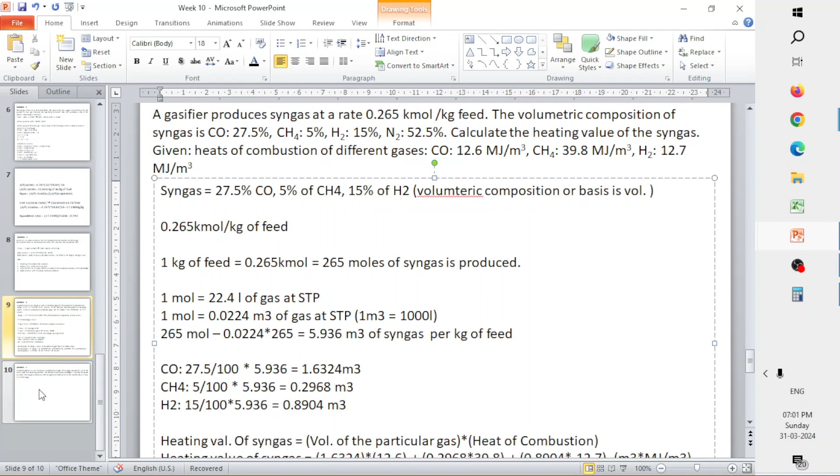So we have one more question, and I guess we have approximately 10 minutes left. Let's solve this question also before we conclude our session for today. I hope you have no doubts with respect to the previous question. If you have any doubts, please let me know.

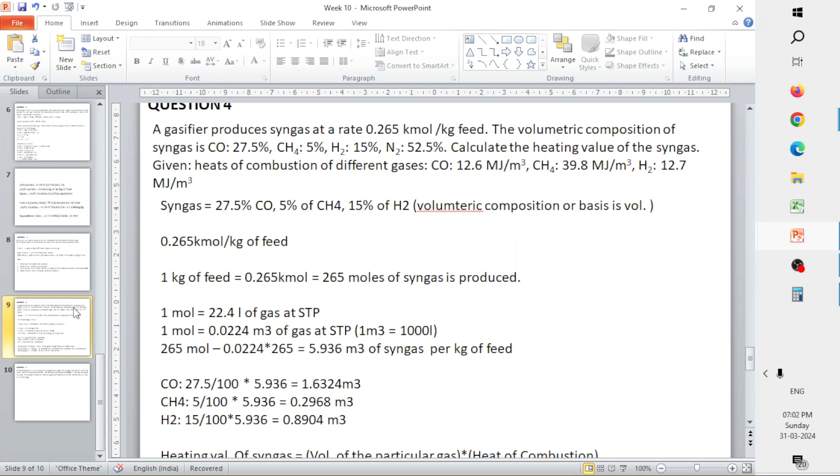So let me just read this question. Your biomass gasifier is used to power a compression engine, and they are operating in a dual fuel mode with 75% diesel replacement, and they have given your biomass feed rate as 450 kg per hour. They are asking you to calculate the amount of power required. The engine efficiency is given as 30%, gasifier efficiency is given as

65%, and now they are asking you to calculate the power required from the system, the power required to run your compression engine. They have given your calorific value as 17,500 kilojoule per kg of biomass.

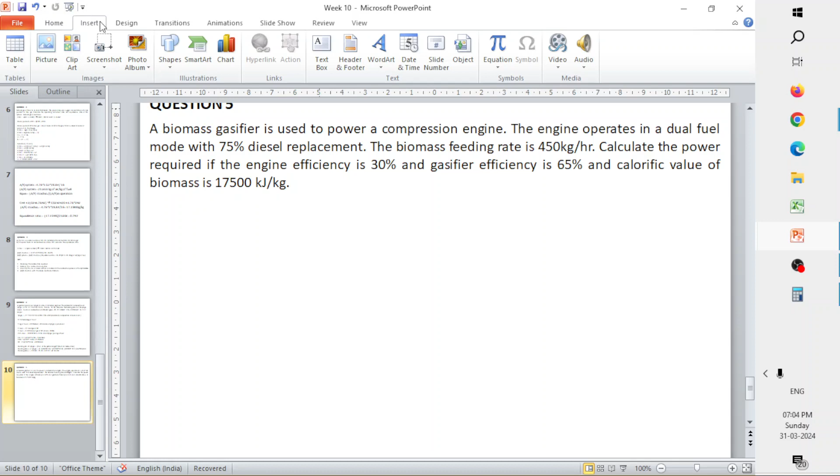So this is very similar to what you would have also seen in the NPTEL course. We are just going to solve one similar problem here also for practice purpose. So how do you go about calculating the power that will be required for running your compression engine? Your biomass feed rate is known, so from here you need to calculate the power required. Let's just start solving the problem.

Since your biomass feed rate is known, you will be able to calculate the power that will be generated by burning this biomass. So the biomass feed rate is 450 kilogram per hour, kg per hour, and you know your calorific value of the biomass as 17,500 kilojoule per kg. So the input power, yes, do you have any doubts?

Hello? Okay, yeah. No, sir. Oh, okay, yeah, fine. So let's just finish this question.

So input power will be nothing but your biomass feed rate times your calorific value. That will be input power is nothing but biomass feed rate 450 times calorific value 17,500. Units will be kg per hour times kilojoules per kg. So the kg will get cancelled and you will be getting 450 times 17,500, which is 7,875,000 kilojoule per hour.

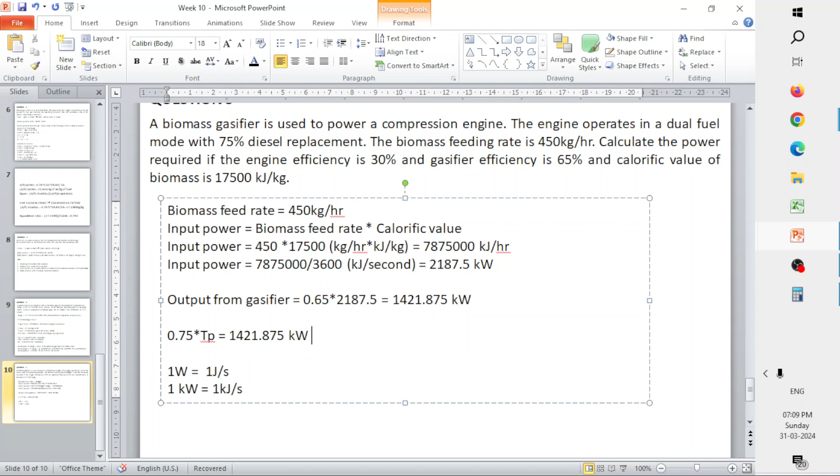So the total power of your engine system will be - so this will be the total power to your engine system - 1421.875 divided by 0.75, that gives 1895.833 kilowatt.

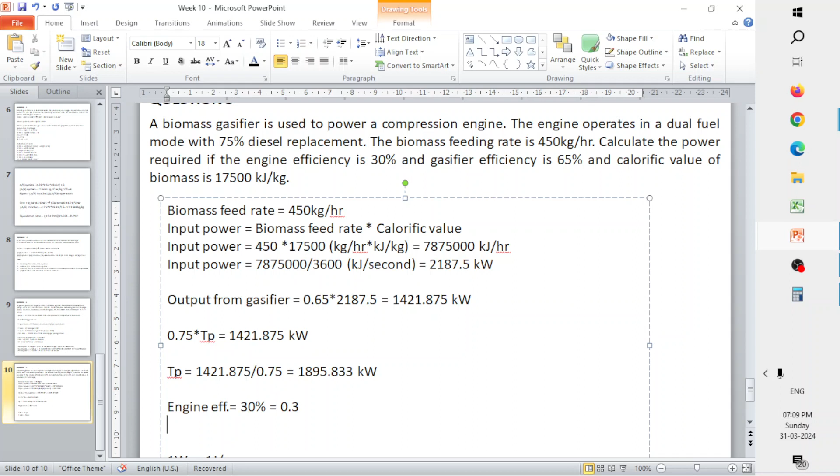Now the engine itself has a particular efficiency of 30%. So engine efficiency is 30%, or that is nothing but 0.3. So you need to multiply this total power that is supplied to your engine times this 0.3, the efficiency. So that will be nothing but 0.3 times 1895.833. So what will be that? 568.7499 kilowatt.

So this will be the power required for running your compression engine. So first your biomass is fed into your gasifier at a particular feed rate. That will basically release energy. So that power that is released from your biomass is nothing but 2187.5 kilowatt. This will be your output from the gasifier, the amount of energy that will be generated in your gasifier.

Since the gasifier efficiency is not 100%, it's only 65%, so the output from your gasifier is nothing but the gasifier efficiency, 0.65, times the power that is generated from burning your biomass. So it will be 1421.875 kilowatt, and this is now fed into your engine.